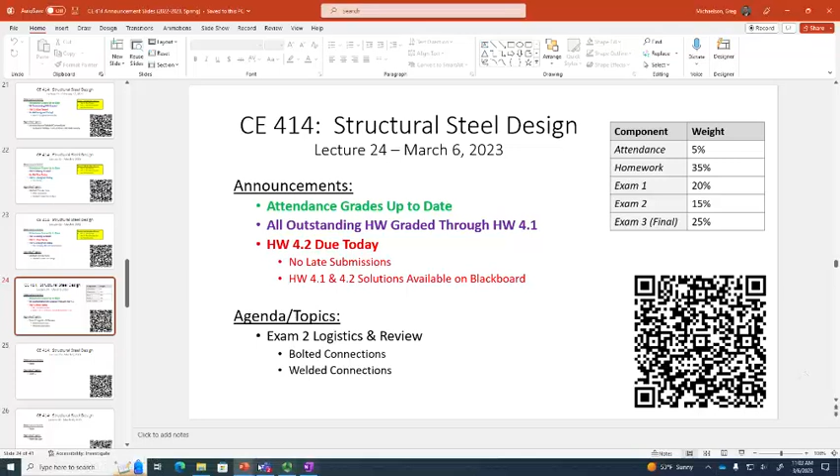So with that, we can get into the logistics of the exam. Remember, we have a celebration on Wednesday, and we do not have class on Friday. Because we're up to date and current, and we've had a relatively light winter with no cancellations, it's made our life a little easier in terms of covering the topics of the class.

Okay, let's talk about the exam. Make sure that you are allowed to use the manual. Obviously you can't use your notes, but you can use a formula sheet. I would suggest bringing a straight edge. I will tell you, at least one problem requires a sketch as your answer, which can't be all that shocking given that this is a test on connection design, and the answers are the connections, right? That's the answer. So it shouldn't be much of a shock that you need to provide a sketch, so a straight edge is probably not the worst idea.

There will be 4 to 5 conceptual questions, 2 to 3 computational problems. Again, make sure you bring your calculator and your formula sheet. You can put whatever you want on your formula sheet. I would suggest you do not put fully worked out example problems, because that's particularly troubling on an exam like this, where a small change in thickness or material strength suddenly makes all your values off.

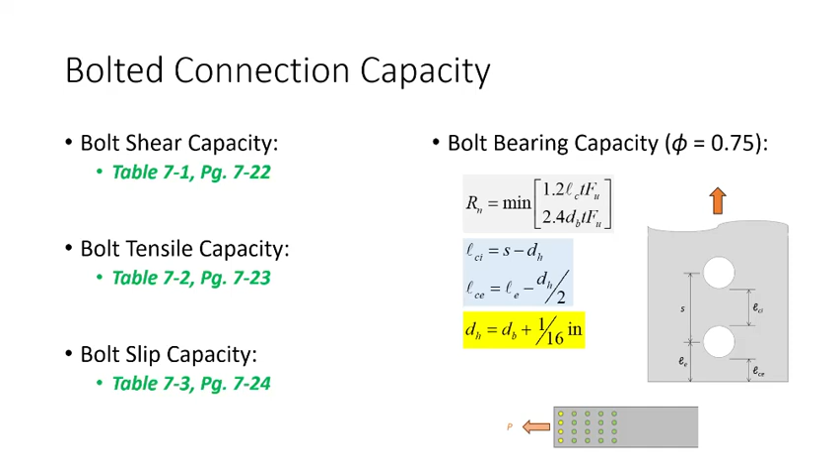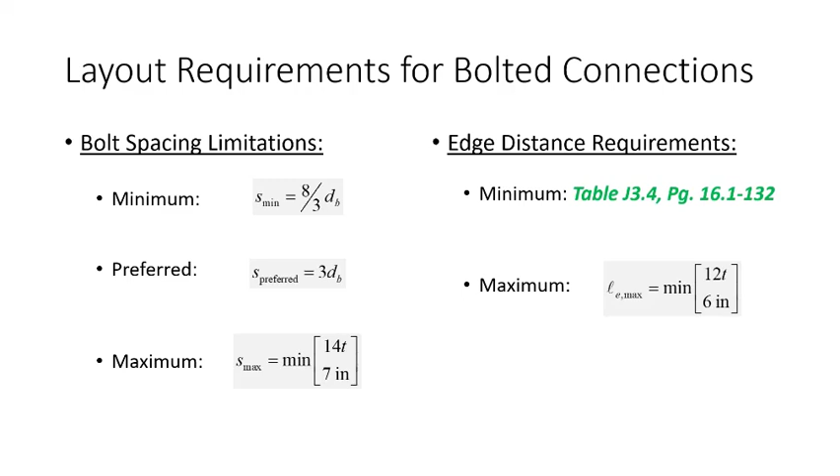For bolted connection capacity, I've combined everything here on this one slide. We have bolt shear capacity, bolt tensile capacity, bolt slip capacity, and bolt bearing capacity. That's the only one you really have to go out of your way to compute, you have to chug through. The layout requirements include minimum bolt spacing, maximum bolt spacing, and your preferred bolt spacing. For edge distance requirements, remember the minimum is the only one you look up, from table 3, or J3.4. The maximum is one that you can compute.

For combined loading, that is also a bearing type connection, so that's why I lumped that in together. Remember, in combined loading scenarios, we're computing a modified tensile capacity and comparing that against the tensile load. Here's our expression. The only thing that's not a lookup is FRV, the applied factored shear stress.

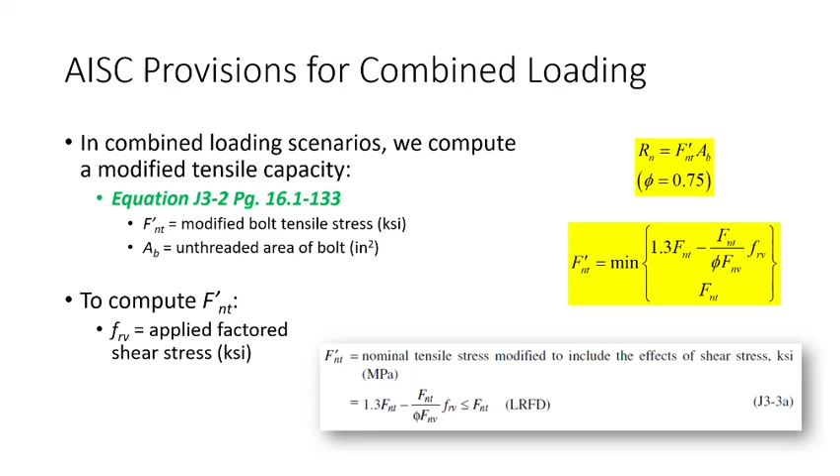So you're taking the shear load per bolt, dividing it by the area per bolt. For designing bolted connections, this is our process. This box is saying you determine the factored load and then the capacity per bolt. If it's a bearing type connection, it's just the shear capacity per bolt. But if it's a slip critical connection, it's the minimum of either the shear capacity or the slip capacity.

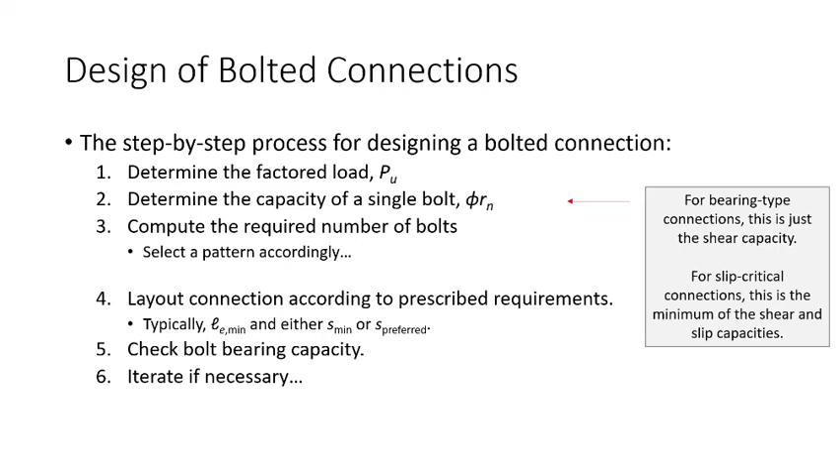You compute the required number of bolts and then select a pattern accordingly - essentially a grid-like pattern that tries to minimize our plate area as much as possible. We lay out the connection according to prescribed requirements, typically the minimum edge distance and either S-min or S-preferred, which will be delineated in the problem. Check the bolt bearing, and then if necessary, iterate. That's basically it for bolted connections.

For welded connections, we have our weld metal capacity and our base metal capacity. For the base metal capacity, there's two limit states: base metal yielding and base metal rupture or fracture. What we've been doing in class is taking each of these three expressions, computing them, and then taking the minimum, just as we would for just about any other limit state. Here are all the terms that go along with that.

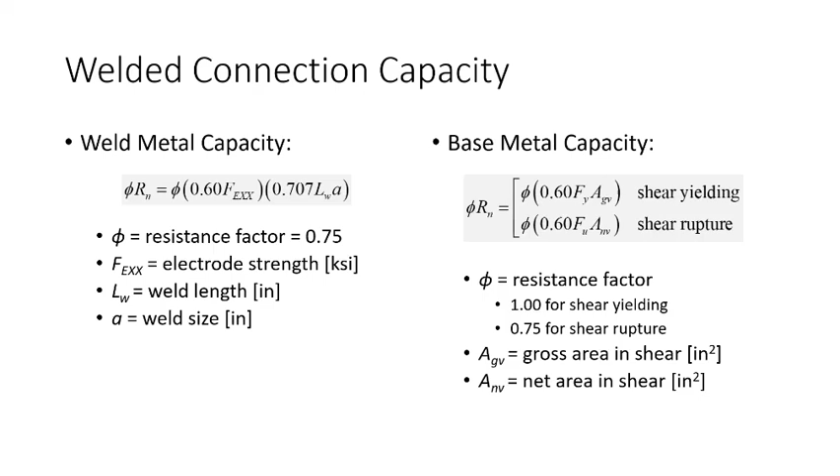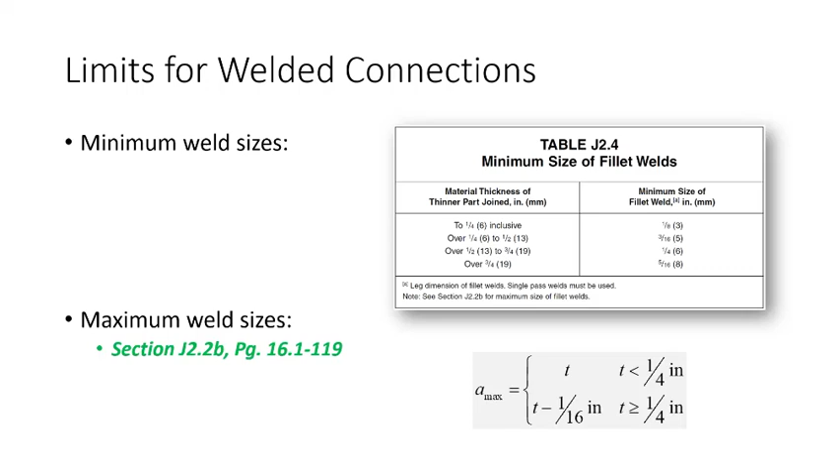For the limits for welded connections, remember minimum weld sizes we look up, maximum weld sizes we compute based on the thickness of the base metal, and remember the different reasons for those.

For designing a welded connection, we determine the factored load and choose a weld size. What is a little counterintuitive is that we choose a weld size based on limitations, and typically we choose the largest weld size, not the smallest, because the largest weld size means the shortest weld length, which means it's quicker to deposit, easier on the wallet. So we choose the largest weld size up to 5/16 of an inch, determine the capacity of a single inch of weld, and then divide it to get the total number of inches.

We can do that either in a symmetric fashion or a balanced weld. I say usually symmetric because other than angles, everything you're usually depositing is symmetric. Angles are probably the only real shape where symmetry isn't present, so you would need to lay that out in a balanced connection if specified. You don't have to lay out an angled connection in a balanced arrangement, but usually that's a good idea to eliminate bending and whatnot.

Limit the weld lengths to the nearest inch - no weld lengths deposited to the nearest half inch or anything like that, just round it up to the nearest inch. And remember, either longitudinal welds or longitudinal and transverse - no transverse welds by themselves, because that is a connection that exhibits poor ductility, which is what we don't like in steel structure behavior. That is it for the second exam.

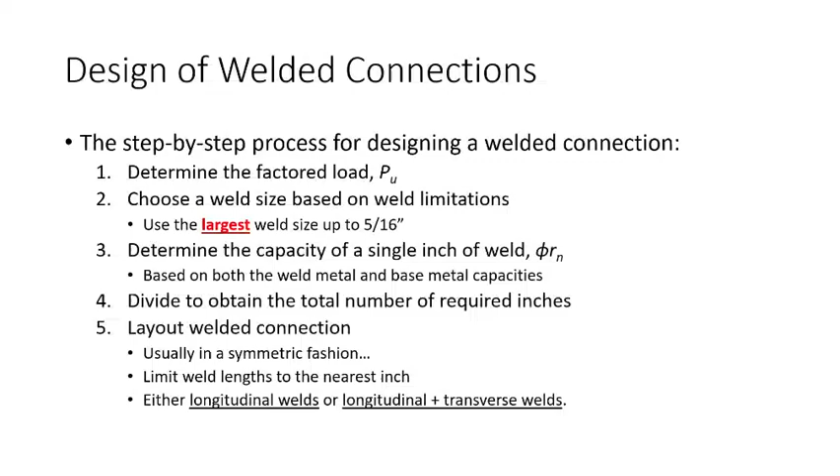Again, like I said, not a lot. It's not that bolted and welded connections just don't comprise that much material in the class, but when we get to columns and beams, that'll add up. Okay, I'm going to shut up, open it up to you all. Any questions that you have, the floor is yours. Or early lunch, whatever works for you.

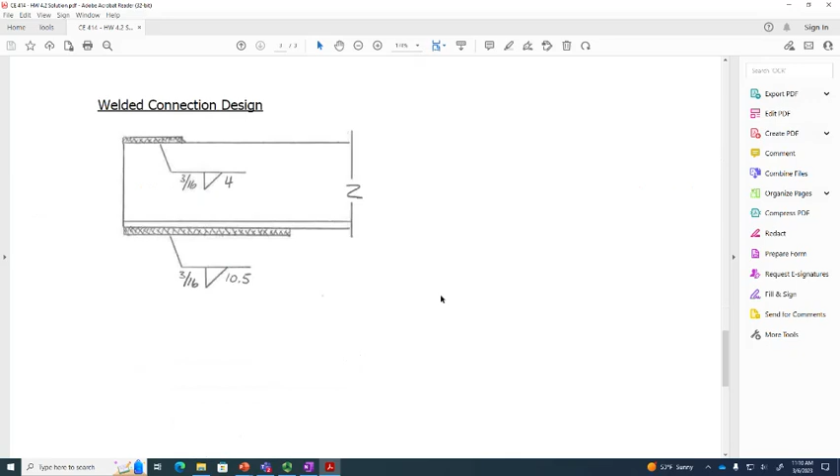Yes? I just had a question about the homework we just turned in. So I was looking at the solution, and for the bottom length, it's 11 inches, or 10.5 inches, and I thought we rounded to the nearest inch. Did I put 10.5? Yeah, I was just curious if that's what we should do. No, it should be 11. Let me see. Yeah, it should be 11. Why did I say 10.5? Yeah, it should be 11.

Okay, yeah, I started telling everybody to round up to the nearest inch about 3 years ago because I just thought it was easier for everybody to get the same answer. But I guess I should have looked, because I pulled that problem out of a problem I gave about 6 years ago. So that would be why. I'll fix that solution and re-upload it. It should be 11.

You could. I just think this is easier and it ensures that you're handling rounding appropriately. That's what I was saying with the whole rounding thing, because you'd have to take your required length and then probably be better to subtract 4 inches, not 3.88 or something. So yeah, I mean, I guess you could do that.

The way I've treated it when I've done these connection designs is I look at each weld independently and say, this weld needs to support this much force, this weld needs to support this much force. So how much weld do I need for each of those to support that much load? That's why I treated it first as an equilibrium problem, then take those forces and determine the weld length for each of them.